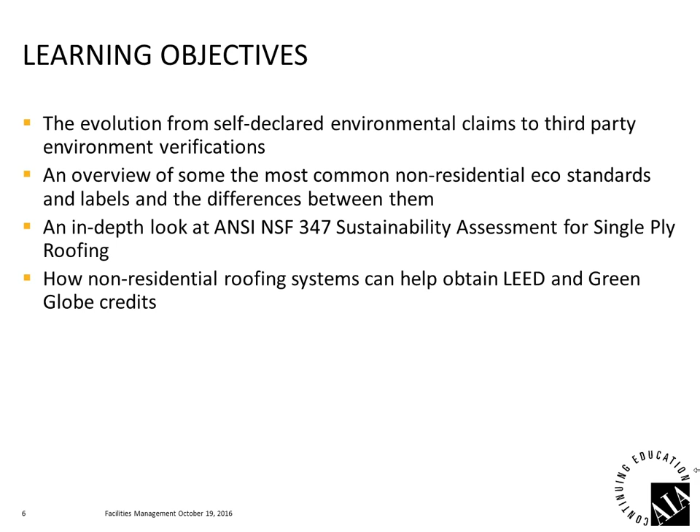So the objectives of the program today: we're going to talk about some examples of self-declared environmental claims and how they've evolved to third-party verified claims and environmental attributes. We're going to look at an overview of some of the most common standards and labels that are out there, and we'll talk about the differences between them. We will go into some depth talking about the ANSI, the American National Standard, NSF 347 Sustainability Standard for single-ply roofing. And we will wrap up with a discussion on some of the credits that are available through roofing materials and roofing systems for achieving credits within LEED and Green Globes.

So green construction materials are a big business. You've probably all seen these kind of headlines. Market for green building materials set to soar through 2019, or even more dramatic: worldwide market for green construction materials will grow from $116 billion in 2013 to $254 billion in 2020. What does it all mean, and how do we sort this out? We obviously all want to do the right thing, but how do we choose the right materials and address these questions?

So there are various ways to assess the ecological profile of construction materials and construction systems. At a product level, we can look at single attributes, and we'll show some examples later, life cycle environmental impacts, and we'll talk about that as well, and multivariable comprehensive assessments, which get more and more sophisticated as we go down that line of attributes and standards.

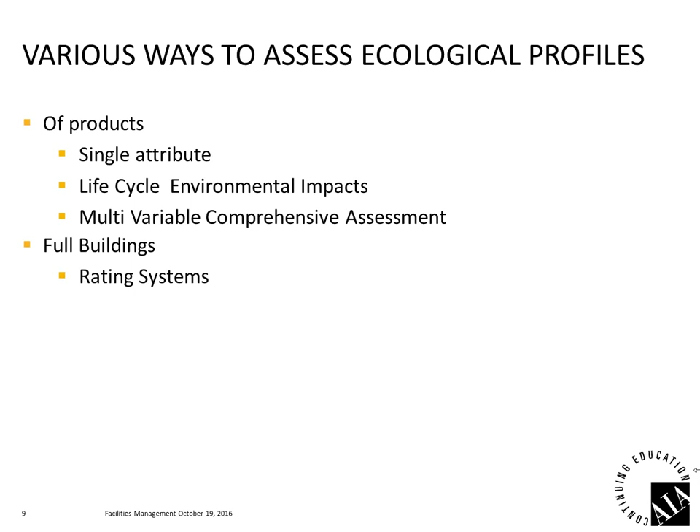The other way, of course, is to look at full buildings, and there we're looking at rating systems like LEED and Green Globe, and we will touch on those as well. So let's move into what is probably the most common of the single attributes that are known to all of us, recycling and recycled content.

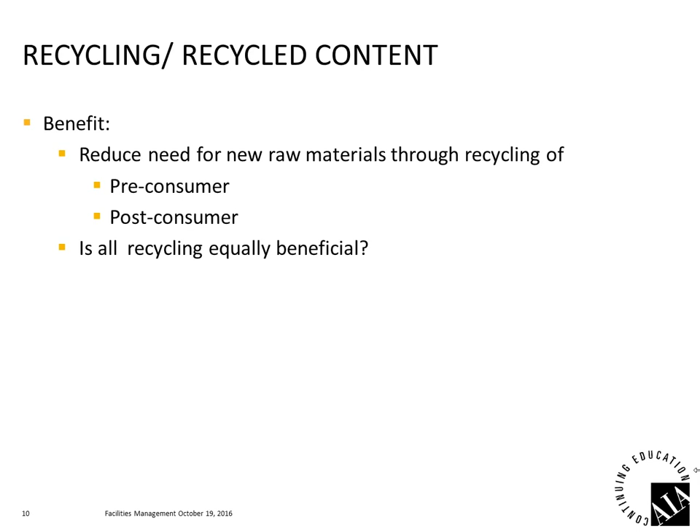Clearly, as a benefit to recycling material, we reduce the need for new raw materials through recycling back into our products, both at a pre-consumer level, in the manufacturing facility before they go out to the construction site, and at the post-consumer level at the end of the service life when the materials can be reclaimed and possibly recycled. Are they equally beneficial from both levels?

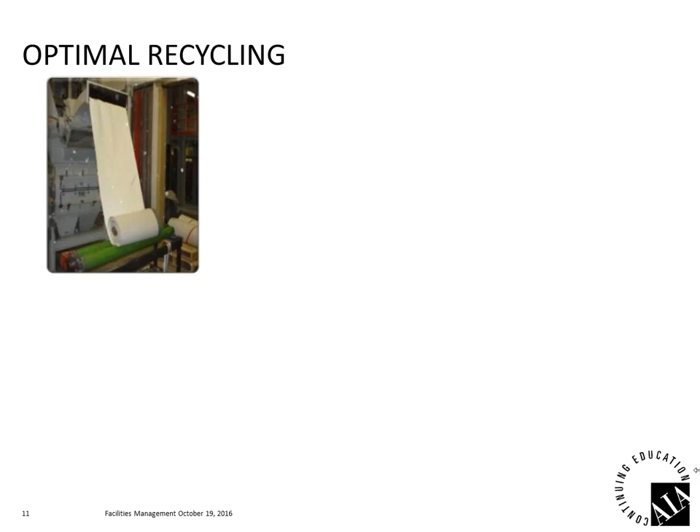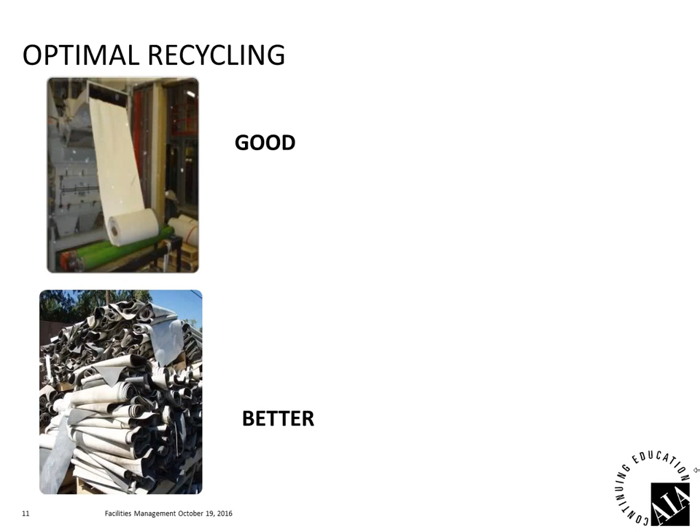Possibly. Optimally, obviously, we want to recycle the materials from our plants and our production facilities, and that, of course, is good. Even better is if we can take back the materials at the end of their service life and recycle those as well. So if we can combine these materials and process them into something of a finished good is ideal. And then in a perfect world, what we try to do is recycle them back into the same type of material that they originated from and provide the same sort of life expectancy.

In this case, trimmings from a production facility as well as material at the end of its service life on a roof are combined and processed into new roofing membranes, which will then go out and provide decades more of service. Ultimately, the ideal closed loop recycling, if you will.

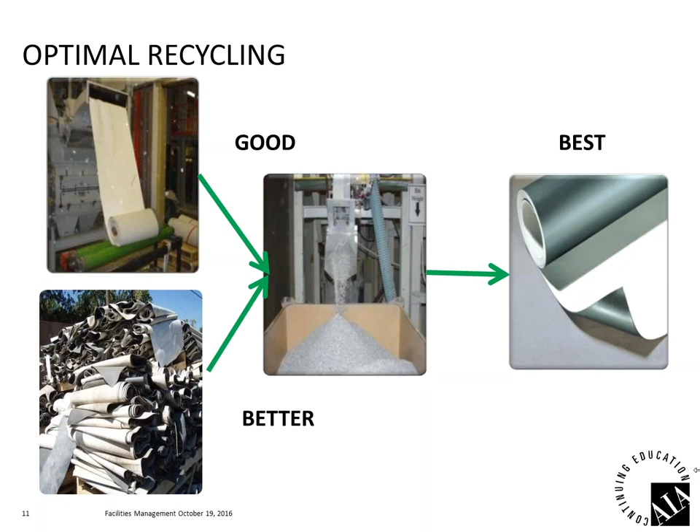Like with many environmental claims, there are a lot of claims made about recycling, particularly as it relates to end of service life recycling. Many vendors will claim that theoretically they can recycle their material at the end of the service life. Technically, they can, but in practice, it may be another story altogether, and there's often evidence that it's not necessarily done despite some of the claims.

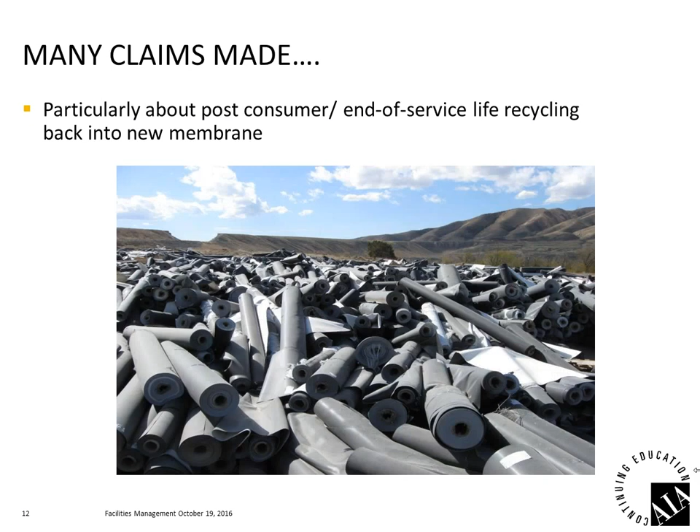So what we'd encourage people to do is request that vendors who make such claims provide them with third-party certification of these claims, and that can be claims for recycled content, for example. It could be claims for bio-based materials and many, many others. And entities like UL Environment will certify those claims. They will validate those claims by auditing facilities,

following the supply chain of materials from being removed from a roof to being processed to being integrated into a membrane, for example. So if that is something that is of importance to you, we would encourage you to ask for a third-party verification of the claim.

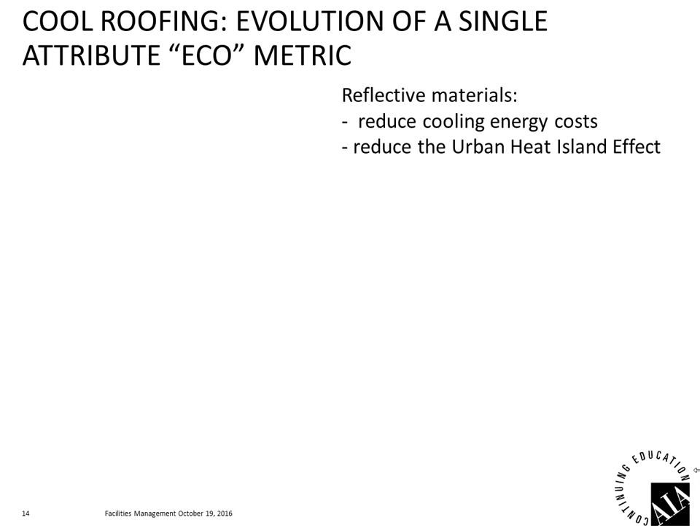Another example of a single attribute that is often referenced in the sustainability world, particularly in the roofing world, is the cool roofing area. For a couple of decades now, cool roofing membranes have been acknowledged as providing energy savings benefits and having an impact on reducing the urban heat island effect.

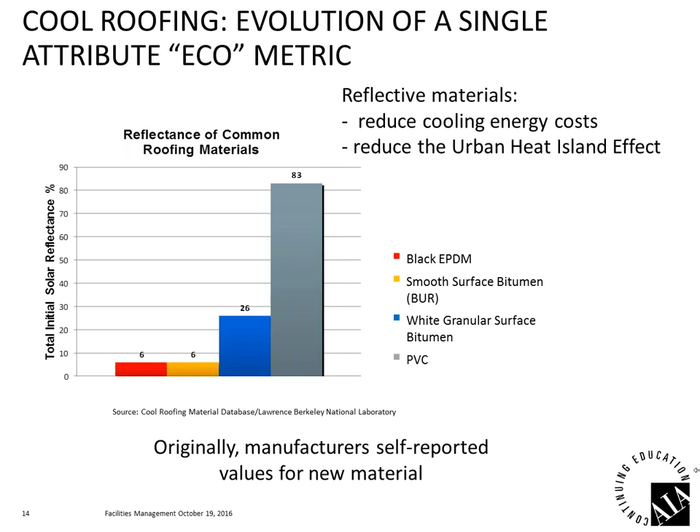In the early days, manufacturers simply tested their own materials and reported their own values in their data sheets and so on, possibly based on different test methods, one from another. So it was difficult for the users to have a proper appreciation of the actual value and the benefit. Over time, Energy Star got involved. Energy Star created a program for roofing materials, and they took things a step further.

They called for reporting of the more relevant aged values because, of course, roofing materials will soil over time, and the reflectivity values that are reported for new materials will not necessarily be those values that are experienced in the field. So that was definitely a giant step forward, as well as creating a database for this data.

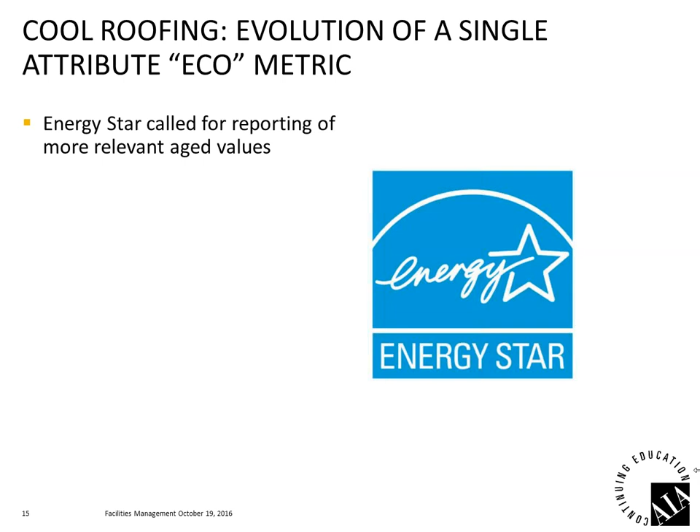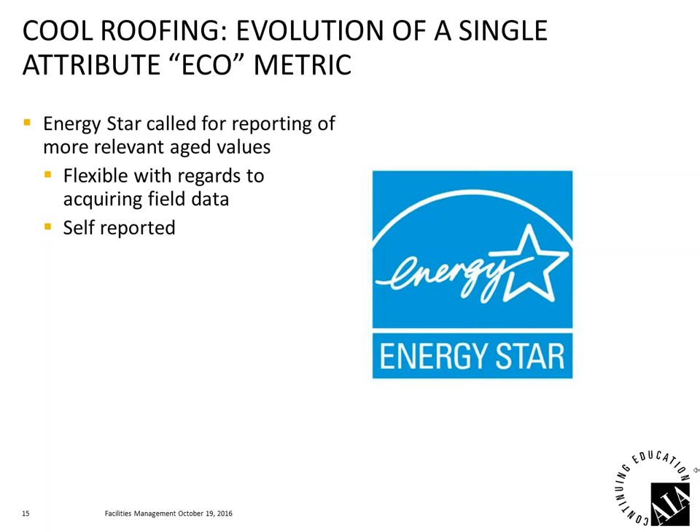They allowed considerable flexibility in acquiring the field data for the aged material, and they allowed for self-reporting. So there was some progress there: a better metric using aged values as opposed to new values, providing some definition on how to achieve those values and providing a database, all the while still allowing manufacturers to self-report their data.

Then over time, the Cool Roof Rating Council came into being, specifically as a result of California's Title 24, where they mandated prescriptive applications using cool roofs in the state of California for energy savings purposes. The Cool Roof Rating Council was founded as the independent body that would manage the data that would be the basis of the Title 24 claims in California and the ratings and so on, and is now commonly referenced and used throughout the country for different purposes, including for Energy Star.

They developed sampling, testing, and standardized aging protocols, which put everybody on the same path, using the same methodologies and the same testing methods, which makes the data more comparable. Most importantly, they required that all testing be done by approved third-party laboratories and that the aging be done at approved third-party weathering farms, defined weathering farms in 3 distinct locations. They developed a database, which is an excellent source of cool roof data on the reflectivity of materials, the aged and new reflectivity of materials, emissivities, and so on.

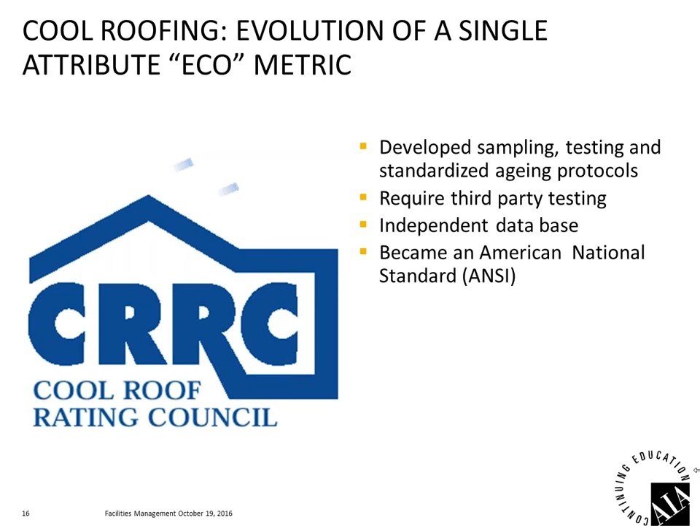And most importantly, they went through the process to become an American national standard, which provides a lot of credibility, provides the ability to reference this data in all types of government programs, for example, and is the epitome of the type of standards that we'd want to reference, and we'll come back to that throughout the course of the presentation. So that gives us a very good example of something that started off on a very low level, self-reporting, very few guidelines, to now a very formal program where people that use the data can trust the data and have very good sources of data available that are comparable amongst different materials and so on. But nonetheless, that is still a single attribute metric.

Now, there are certainly some pros and there are certainly cons to single attributes. The pros, of course, are that they're simple, they're easy to understand. You either have recycled content in your material or you do not. You achieve a certain reflectivity value or another value. One product may have a higher value than another. Very clear, very easy to do. If that's what's important to you, then that allows you to focus on that. If recycled content or organic-based raw materials are important to you, or reflectivity is important to you, you can focus in on that, get good data, and very often that data is third-party verified or certified.

There are, of course, some significant shortcomings. Obviously, that's a very narrow focus on a single attribute or maybe a couple of attributes. Generally, what can happen and will happen is by focusing on a single attribute or maybe a couple of attributes, we might ignore a number of other equally and often more important environmental attributes. So certainly a benefit to them, but certainly some very real limitations. And again, if you are going to use those, we encourage you to look for values that are available through third-party testing, third-party documents, rather than simple claims.

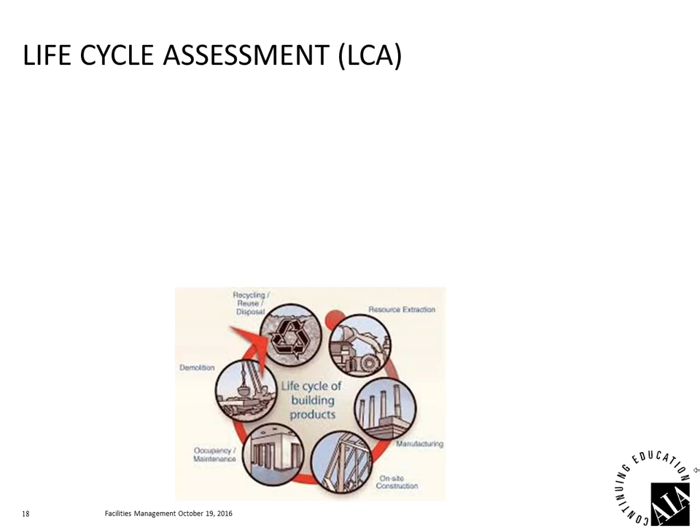The next level of sustainability standard or reporting is life cycle assessment. Life cycle assessment involves a technique to look at a product's life cycle impacts through the entire stage, from raw material extraction at the very least and always, to the end of the service life in some instances, and we'll cover that in a little greater detail in a moment. The idea is to compile an inventory of material and energy inputs. So the material could be raw materials and so on, and then of course energy, as well as outputs, which could be releases, consumption of water or other materials, or releasing things into the environment. And that's done across a number of environmental impacts, and then they go into a calculation methodology that gives us a quantitative measure of a product or a system's environmental impact through various stages.

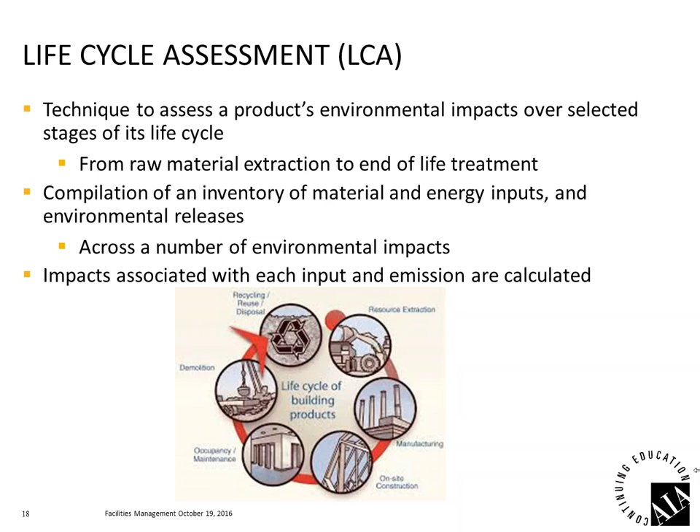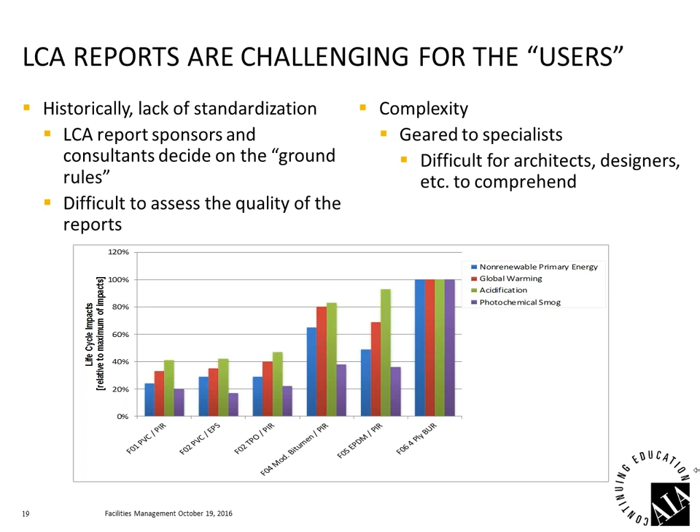Life cycle assessment reports are very complicated documents. The process is very complicated. You can see here some of the metrics are a little alien to us: non-renewable primary energy, global warming potential, acidification, photochemical smog. Historically, these reports were done by consultants with their clients, both of whom would decide on the ground rules. And like most things in life, the devil is in the detail. Often the details were very hard to find in these reports, and it's very difficult to assess the quality of the report, the validity of the conclusions or the data that was presented. And the reality is these are very complex documents, written by scientists for other scientists, and very difficult for architects or building operators or designers and others to comprehend and to use the data.

So the International Standard Organization, recognizing that challenge, developed protocols on how to conduct life cycle assessments and how to report their results. These are called environmental product declarations, probably a word you've heard. They're becoming very, very popular for a variety of reasons. And we'll talk a little bit about them, where they come from and how they are generated.

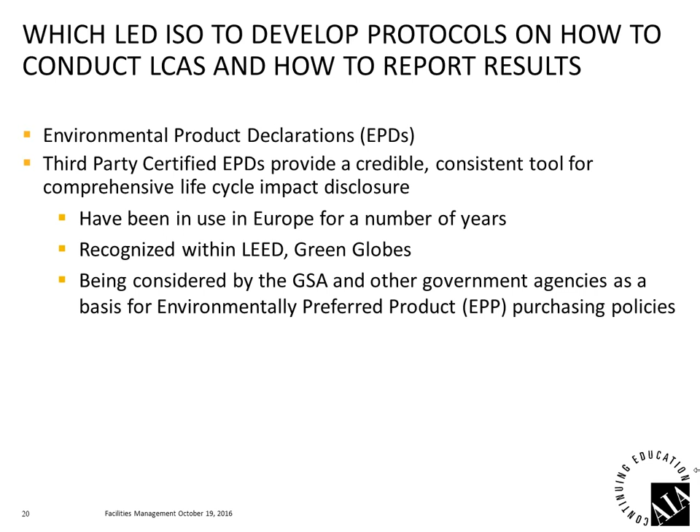Typically, a third-party certified EPD gives you a very credible, consistent tool for assessing life cycle impact data. They've been in use in Europe for a number of years now, going back probably to the late 80s, early 90s at the very least. They are now recognized in both LEED and in Green Globes, and they are being considered by the General Services Administration and other federal agencies like the Department of Defense as a basis for environmentally preferred product purchasing policies and decisions.

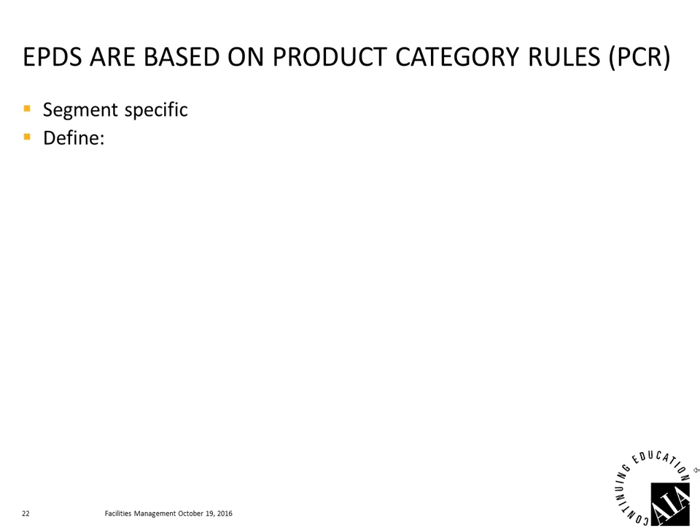Environmental product declarations document products' life cycle environmental impacts and are LCA based. In a sense, they standardize the LCA, the life cycle assessments, and instruct on how to report that data. The key is that they allow for transparency with regards to a product's environmental impacts. So they're segment specific, so that means within a given type of construction material, insulation, roofing membranes, wall panels, glass, or whatever the case may be. Typically, they will have the following elements in each of them.

They will have a declared unit. So in the case of a roofing material, that declared unit would be one square meter of membrane. So all the data that you will see reported will be for 1 square meter of membrane. The one thing you'll note with environmental product declarations is they are typically done in metric units. 1 square meter of membrane is about 10 square feet of membrane.

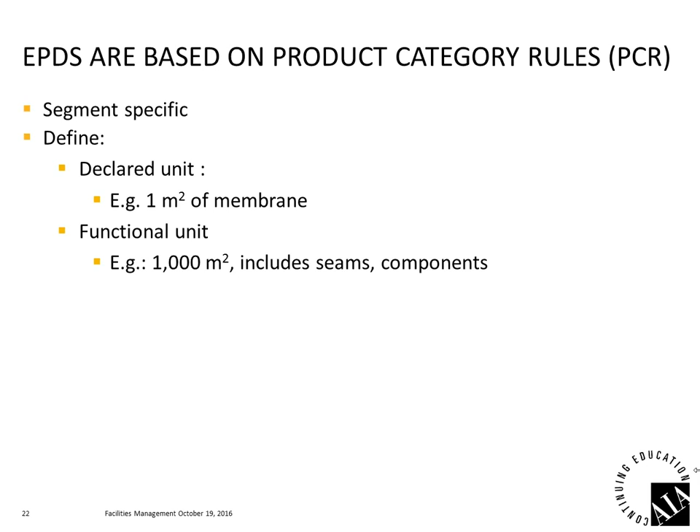Now, that is a declared unit, and it does not reflect physically what happens in the field, which is a functional unit. So a functional unit may be defined, in this case, sticking with the example of a roofing membrane, as 1,000 square meters or 10,000 square feet, for example, which would include seams and overlaps, any materials you might need to create those seams. If you're using a rubber-based sheet, you would need adhesives and tapes and primers and so on, and they would be included. And depending on the system you're defining, whether it be adhered or mechanically attached, it would also include the components, be it fasteners or adhesives, for example.

Beyond that, it will define a number of the technical aspects of the environmental product declaration being considered. One is the impact categories. There are about 24 impact categories, and many are not practical in all cases. Some are very, very specific and may apply to very specific types of products. And secondly, these environmental product declarations are very expensive to develop, and one tends to, through the product category rules, narrow the impact categories down to the ones that are most important and have the most impact for a given type of material, typically anywhere from 3 to half a dozen.

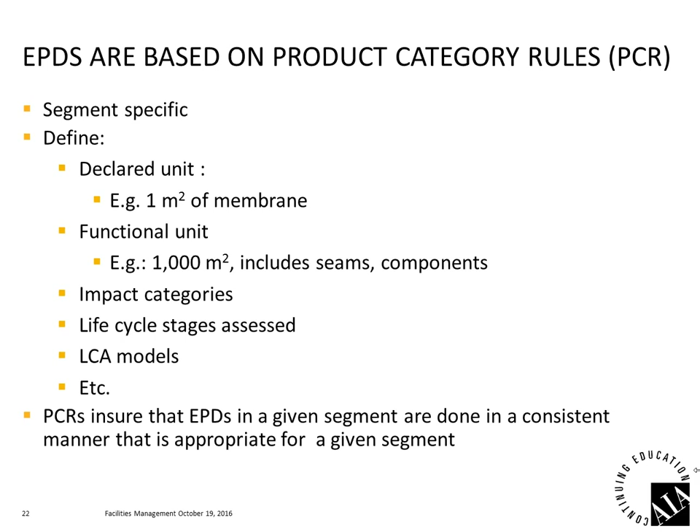It will describe the various life cycle stages being considered. It will describe the life cycle assessment models. For example, in the US, we typically use the EPA's TRACI model for life cycle assessments. Europe would use different models, and so on. And the idea is to ensure that for a given segment, thermal insulation, for example, all the environmental product declarations are done in a consistent manner and reflect the appropriate elements, such as the appropriate impact categories for the given segment.

In the low slope roofing industry, we're actually well served. All the most important components that we use in low slope roofing already have product category rules. So the bituminous roofing materials, modified bituminous, built up bituminous, asphalt shingles, for example, have product category rules. Single ply roofing membranes also have product category rules, as well as the thermal insulation. So we can cover all the key components of a low slope roofing system with environmental product declarations.

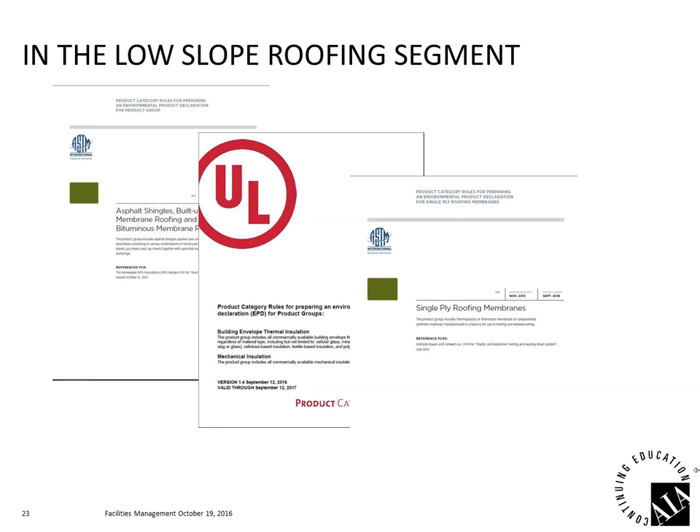So literally we're looking at all the impacts related to extracting the raw materials from the ground or from the earth, processing them to the degree they have to be processed, any transportation between where they were extracted, where they were processed, and where they might be transported further to the manufacturing facility. All the impacts related to the actual manufacturing of the product, and this would be considered a gate. So all the elements I just described would be one gate, for example, a product stage. Then you would move on to the construction process.

Then you would also look at the transportation, and you'll see that come up many, many times. Transportation, of course, has a significant environmental impact, and the further you have to ship materials, the greater the impacts, and those are considered. Then we would have any energy or other materials that are involved in the actual installation process, and they would also have impacts, and they would be classified and quantified here. So we would have our second phase, the construction process stage, which would be phases A4 and A5.

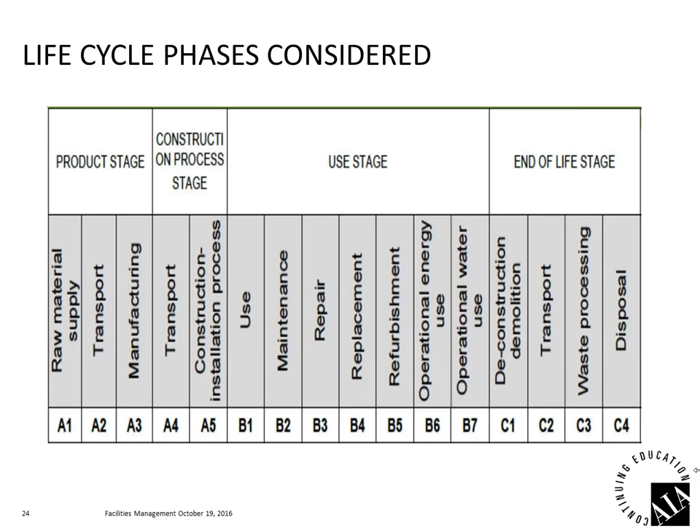And then the end of life stage, as the name implies, is what happens at the end of the service life when you deconstruct the assembly and demolish it or the building. You'll again have to transport the materials that you've generated. You will have to process them in some way and dispose of them. And that, of course, could be transporting them for recycling and then reintegrating them back to the start of the process as a new raw material.

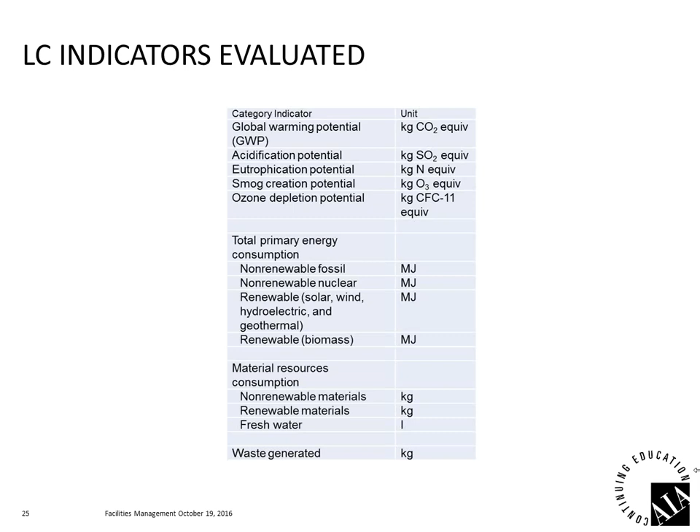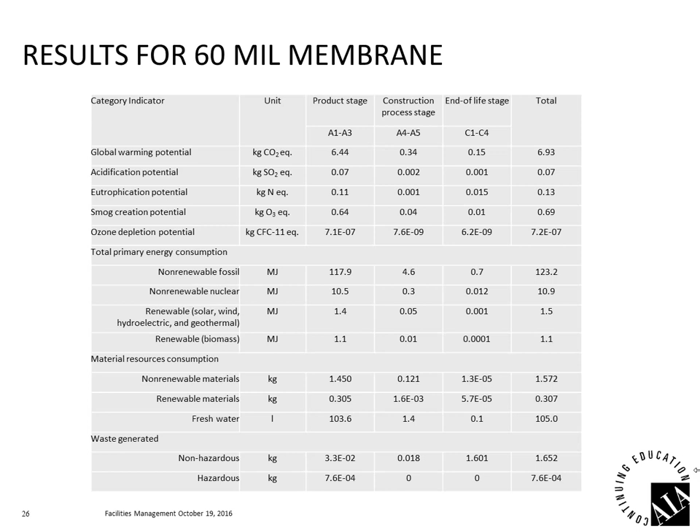And the same as we go down the table there for non-renewable fuels and renewable fuels and material consumption and so on. So that is the most essential part of an environmental product declaration, and that is the type of data that you will get from such a document.

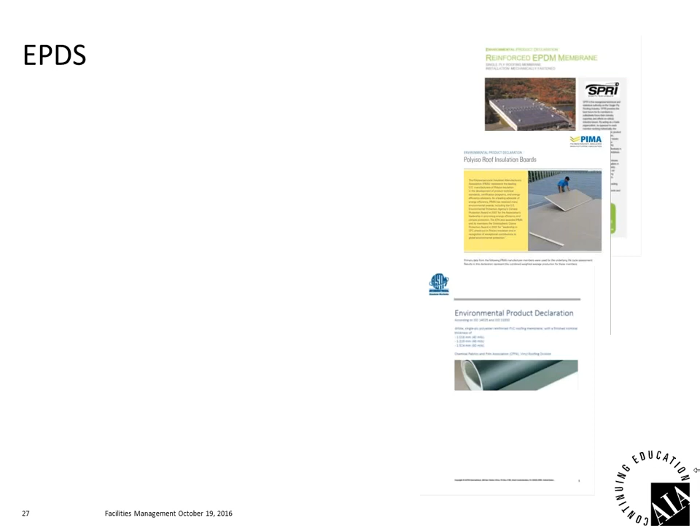So the environmental product declarations are available in a couple of ways. They can be done on a generic type of level. So you can get an environmental product declaration for PVC roofing membranes, for example, which is what's shown at the bottom of the little stack of 3 environmental product declarations, or TPO or EPDM, which is at the top, or for polyiso insulation, which is in the middle there.

These are typically done by trade associations, and the specific document covers only those products that are listed within the environmental product declaration. So if a manufacturer sells or markets a similar product, for example, a PVC, and tries to tell you, here's my environmental product declaration, if they're not actually listed in there as one of the companies that participate in that environmental product declaration, it is not considered to cover their product, and they are not compliant with it and cannot use it.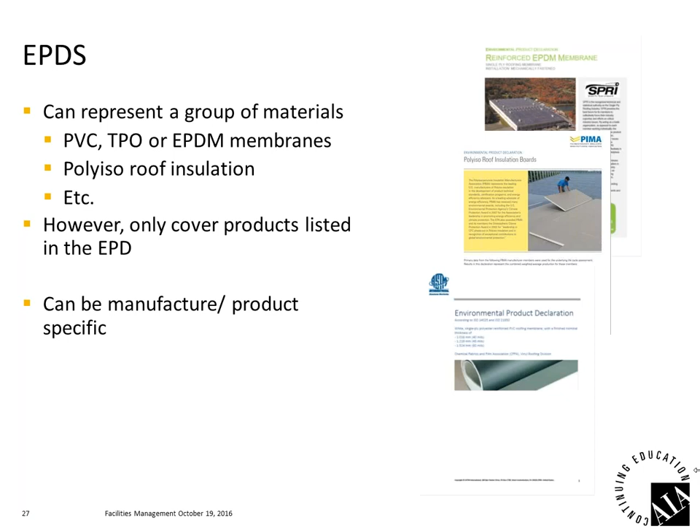And then, of course, environmental product declarations can be completed and are available for a specific product from a specific manufacturer, which of course is even better, more accurate, more specific to the product that you might be using. Now, environmental product declarations are a step further from single attributes. They cover many, many attributes of the product over different periods of the life cycle, but there are still some challenges and some shortcomings with regards to environmental product declarations.

Environmental product declarations, if we are to do a cradle to grave, which is from extracting raw materials to the end of the service life and either disposal or incineration or recycling, can only be done if we have a reference service life. And reference service life is essentially the life expectancy of the product. Life expectancy is the biggest single driver of any life cycle assessment. And the challenge is that we don't have a standard definition for something like a roofing membrane to say that the reference service life of product X is Y years, 10 years, 20 years, 30 years. And that, of course, is very, very important if you want to do a proper cradle to grave environmental product declaration.

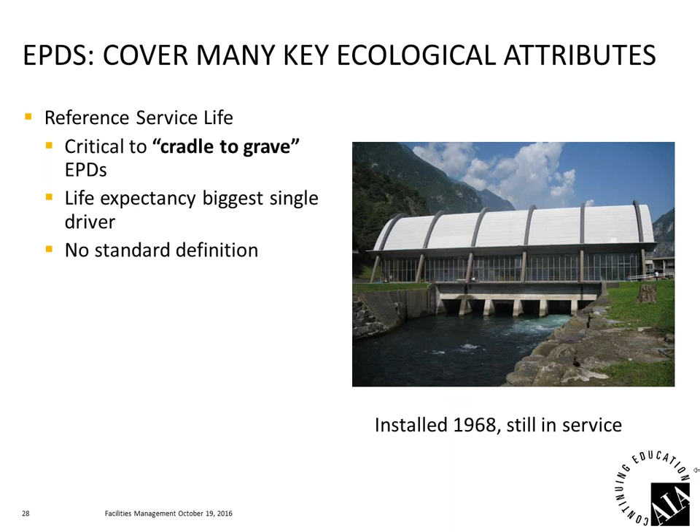And at this point, it's probably a good point to remind people, one of the things that we can't lose sight of as we strive to be ever more sustainable is performance. And at the end of the day, the most important sustainability attribute of a product is its durability. And the longer something lasts, particularly when we're talking about building materials, and more specifically about building envelope materials, where it is very expensive and very difficult to replace them, durability and life expectancy are very, very important.

So in the short term, because we really do not have a standard definition for reference service life, the environmental product declarations will likely be cradle to gate. That would be specifically the manufacturing of the product and possibly up to the installation of the product with the associated accessories of fasteners or seam tapes or adhesives or something like that. At this time, certainly in the roofing industry, there are no cradle to grave environmental product declarations that are ISO compliant.

A number of them were done many, many years ago before these product category rules were developed, and one would really not be able to use those today because they're not built on the standards defined by the product category rules. The challenge with that is that, according to the International Standards Organization, cradle to gate environmental product declarations are not intended and not suitable for comparison.

And the reason for that is if product A has, for discussion's sake, 10% lesser environmental impacts than product B, but if product B lasts twice as long, that's not captured in a cradle to gate and can give very misleading results. So the International Standards Organization cautions that cradle to gate environmental product declarations should not be compared one to another, or you should not make product decisions based on that because it can be misleading without the cradle to grave element or the reference service life element.

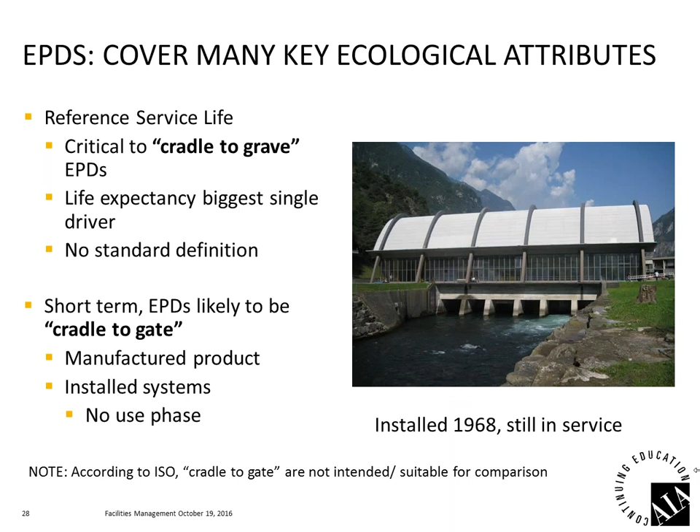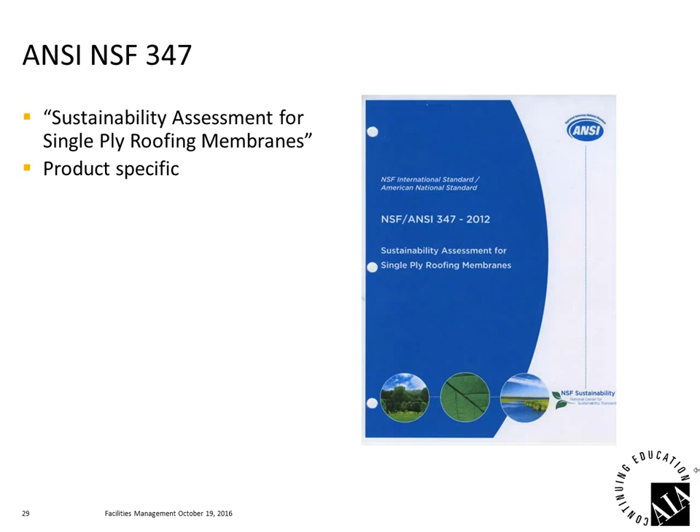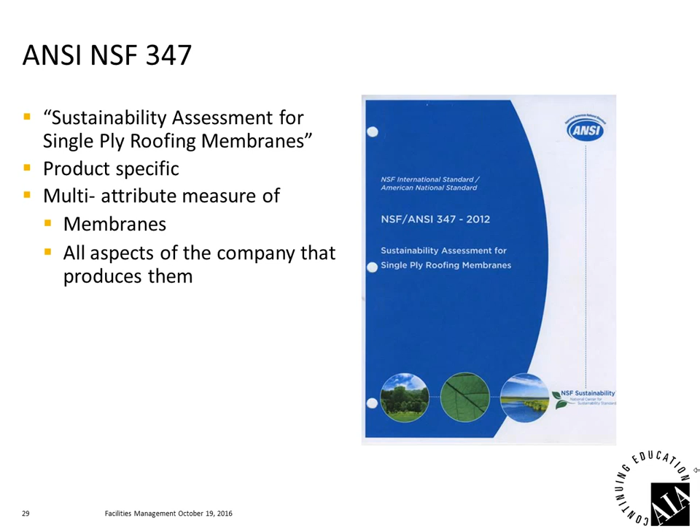So now moving on to the next step in our evolution of eco-labeling and eco-standards, we're going to talk about ANSI, which stands for American National Standards Institute, NSF 347. NSF 347 is the Sustainability Assessment for Single-Ply Roofing Membranes. The assessments are product-specific. Unlike environmental product declarations, you cannot do a sustainability assessment for a group of products because it's very specific to a material, very specific to the aspects surrounding that material, the company that manufactures it, how it manufactures it, and a variety of other things that we'll go into detail here in a moment.

So it is an American national standard. Again, that means it can be referenced in government purchasing policies, can be referenced in building codes. In fact, it is now, and I'll bring that up in a moment. Green Globes formally recognizes the ANSI standards. There's a suite of them, which I'll describe at the end here, but specifically as it relates to roofing materials. And in fact, now the International Green Construction Code in the 2015 edition does reference these ANSI NSF standards. These multi-attribute standards are referenced to define sustainable materials, including NSF ANSI 347, which is the standard for single-ply roofing membranes.

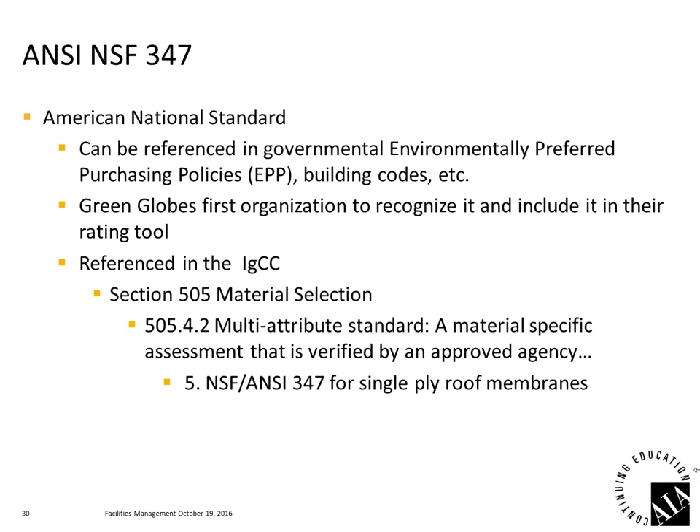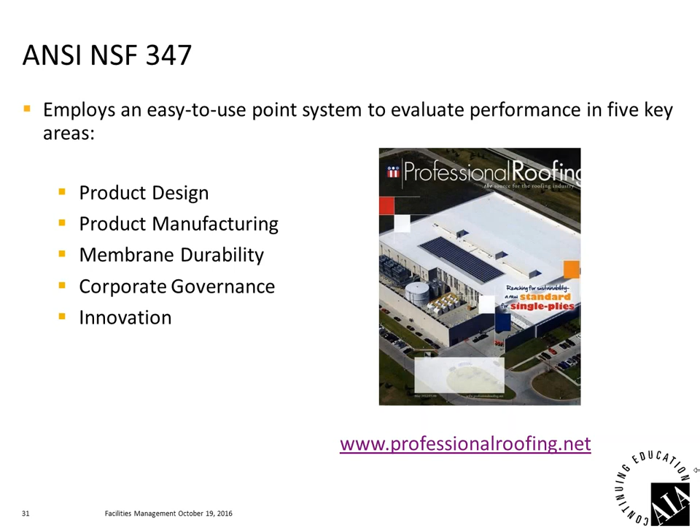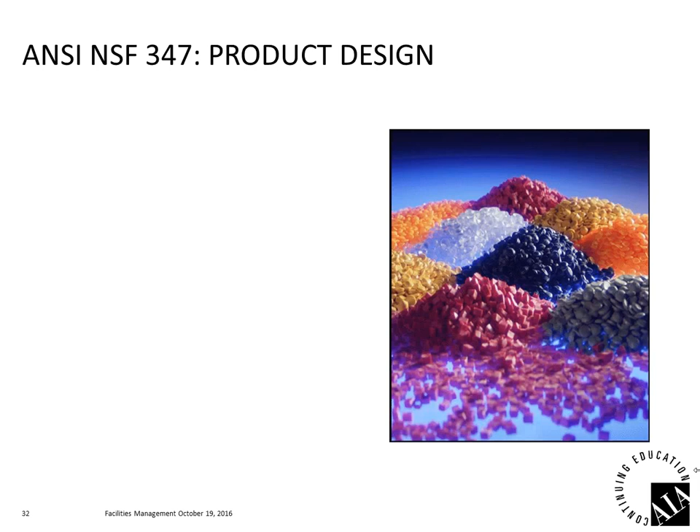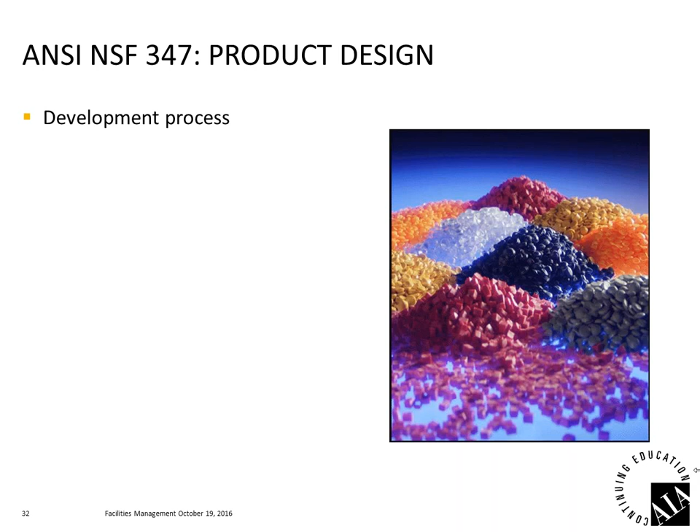So the first area assessed within ANSI NSF 347 is product design, and that goes from the development process. As part of the audit process, you have to demonstrate that the development process within the company has formal checklists and formal processes to ensure that sustainability and environmental impacts are always considered in the development process for new products. You have to demonstrate the use of sustainable inputs like recycled materials and bio-based products and so on. The use of those materials provides additional points. Failure to have those materials does not cost points, but does not gain points.

There is a section on chemicals of concern. So there are 6 lists, such as the International Agency for Research on Cancer and a few others. And if you have raw materials that are on those lists, you do not get points. But if you do not have any of those chemicals, you can gain additional points for not having those chemicals on these reference lists in your product. There's an obligation to understand your suppliers, environmental policies, and whether they're complying with all environmental regulations, whether they have environmental plans and management processes in place.

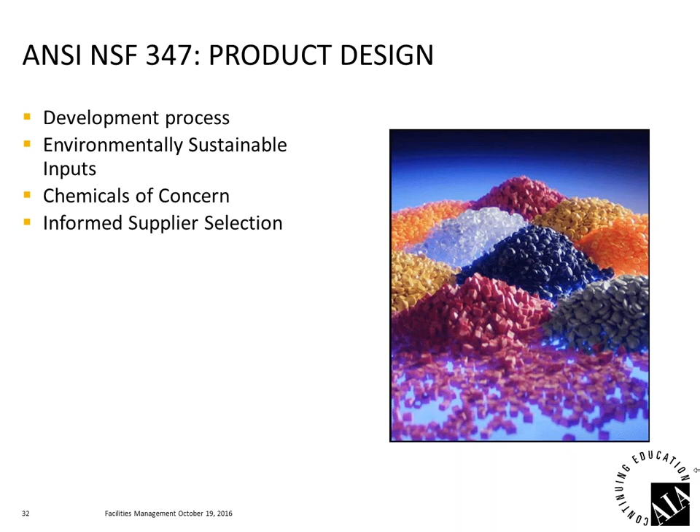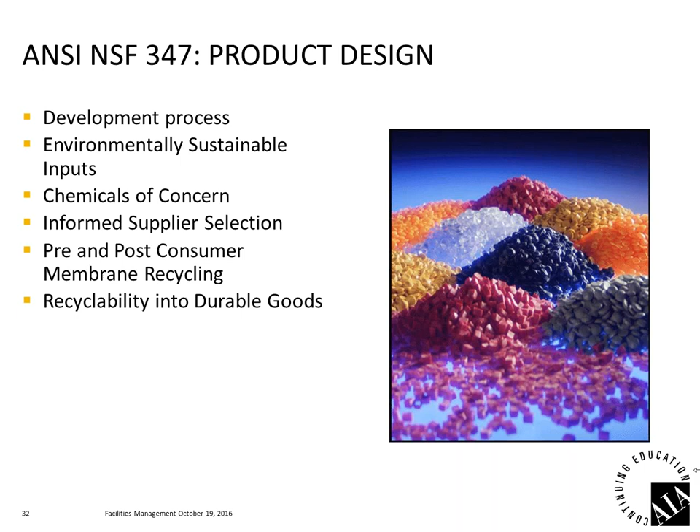They look at the use of pre- and post-consumer membrane recycling, and they also consider, if you do recycle materials, that you're recycling them into durable goods, ideally into the same material, but if not, into goods that are long-lasting. The longer lasting the goods you recycle into, the more points you can acquire in this particular section.

The next section is product manufacturing, and as the name implies, has everything to do with how the materials are produced. The manufacturer has to demonstrate that they have environmental policies in place and how they manage those to ensure that they are implemented and that they are in fact used as described. Additional points are available if third-party audits are done of the environmental management system, and additional points if those results are published. There are a series of points for emissions and usage, water, energy, raw materials, and air.

These points are set up in such a way as to provide points either for minimizing the use of these resources, demonstrating reduction over a certain period of time, particularly over 5 years, and the greater the reduction, the more points that are allocated. The standard is in some ways challenging because there are diminishing returns in doing that, and it becomes more and more difficult to keep up those levels of reduction in any of those resources. But that is one of the fundamental goals of the standard, is to encourage companies to continually improve their processes to reduce the environmental impacts.

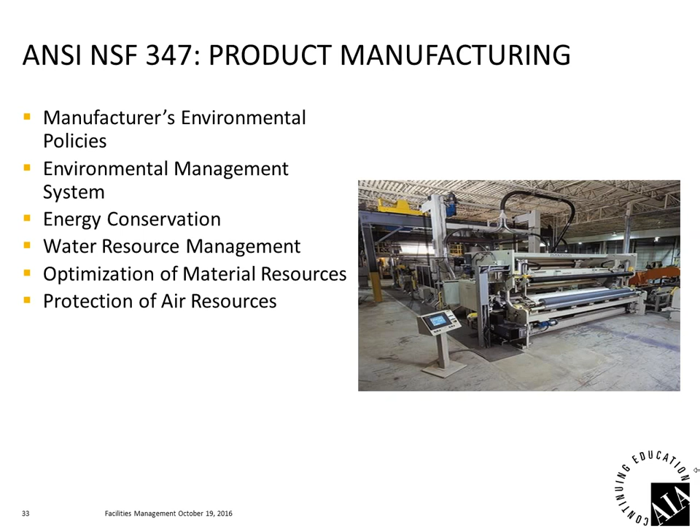The next area that is very important to the standard is durability. Going back to the point I discussed earlier, proven performance in the field is extremely important and a huge driver of environmental impacts. The standard allows for points for proven performance in the field, and the longer the material has been in use in the field and it can be proven that it has been performing in the field, the more points are allocated to that section. There's consideration of the membrane's energy surface contribution, specifically as it relates to reflectivity and energy savings, roofing energy savings.

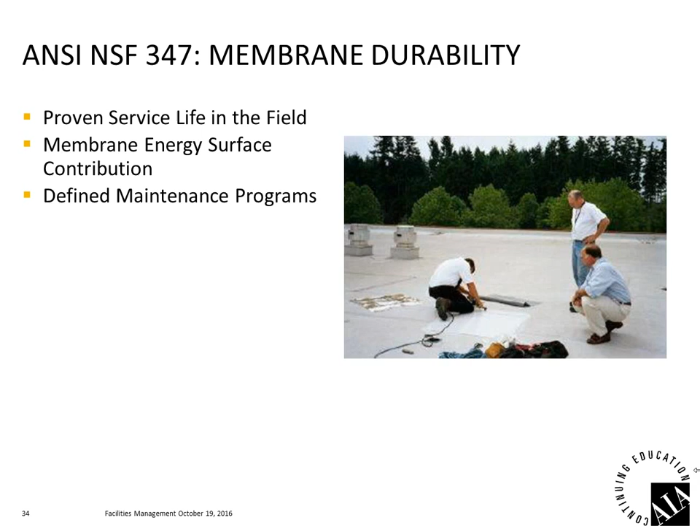The standard assesses the company's maintenance programs for the roofs. Clearly, the roofing system is more likely to reach its expected service life if it is maintained and if there are clear guidelines on how to maintain the roof to achieve that projected service life. There are points for having a field quality management system. Even the best of materials will not perform to its expected service life if it's not installed correctly, and manufacturers have to demonstrate that they do go out in the field and they do work with the contractors to ensure that the materials are properly installed.

And then there are points for ongoing monitoring of the performance of the material in the field in different climate zones to make sure that the material is performing, continues to perform, and that any findings in terms of aging mechanisms and so on are considered in the development process, again with the idea of always looking to continuously improve the product and reduce impacts.

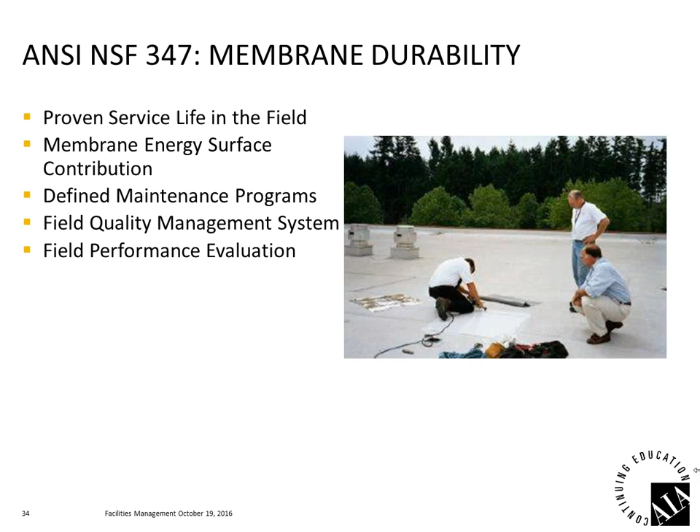Corporate governance is important to the standard with regards to labor policies. Most of the policies covered in here are really regulated in the US, and most companies will of course comply with these, but there are prerequisites to meet and there are points to be had for that. Employee relations and employee development. You have to demonstrate that you are training employees and continuously striving to improve your employees' work skills, work set, and expertise and knowledge. Safety, of course, is very important, both with regards to the employees and with regard to the stakeholders who may be in the area of the production facility.

Public outreach and education, demonstrating involvement in industry groups, whether they be trade associations, standard writing bodies, providing educational seminars like the one I'm doing right now, for example, and documenting those and reaching certain levels. And then investment in the community, which of course is a duty we should all have through our corporations to invest in our local communities. And those things are assessed as well under the auspices of the corporate governance section.

And then there is the possibility with a general kind of category called innovation, and that would involve either dramatically exceeding the levels of the various metrics that are described in the standard and achieving much higher levels, or achieving them with new and innovative techniques that result in even less burdens on the environment, or extend the life expectancy of a material or something like that. And there's the opportunity there to achieve additional points for innovation at the auditor's discretion.

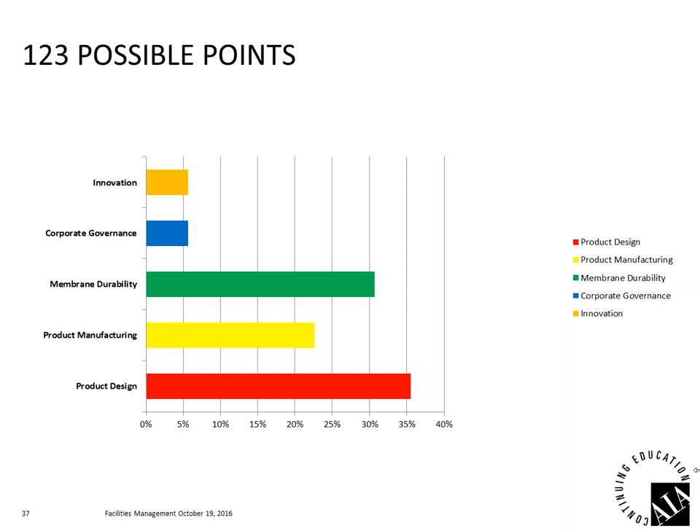Excuse me, Stan? Yep. Hi, it's Ann. I'm sorry to break in. I just did want to ask a question while you were kind of talking about the elements of the standard here and how product is so important.

And as you know, I want to make sure to get this question in as we have about 15 minutes or so left. I wanted to ask you if you could quickly mention how the ANSI NSF 347 compares, just the high points, with environmental product declarations. Are they to be compared side by side, or does the ANSI standard offer something beyond? If you can quickly comment on that.

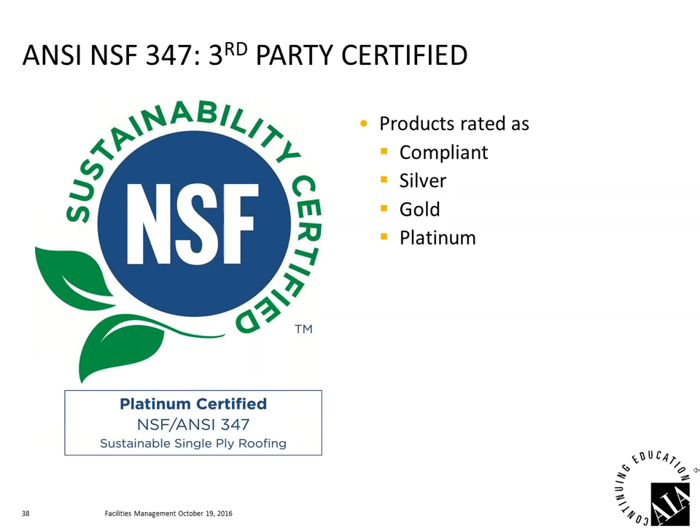Yeah, thank you. The ANSI standard goes way beyond the environmental product declarations. In fact, you can get points within the ANSI standard for having environmental product declarations, but it goes way beyond that, as I mentioned, with a focus on proven performance, with a focus on the approach to development, and ensuring you're always improving the product and doing continuous improvement. So the EPDs are an element of the ANSI standard, but it's only a small part of it, and the ANSI standard goes in much greater depth and detail.

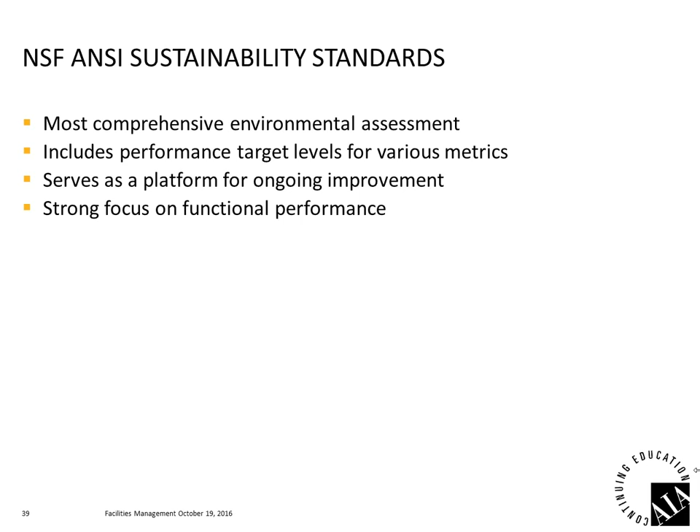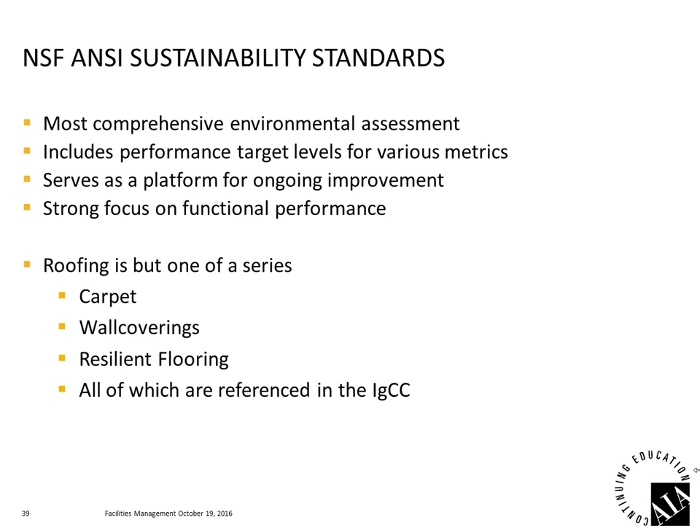So it is really the most comprehensive of all the environmental standards that we have, and as I indicated, includes performance targets, levels for various metrics, and really is a great platform for ongoing improvement and has a strong focus on functional performance. The roofing standard is only one of a number of standards. There are also a whole suite of similar standards for carpet, wall coverings, resilient floorings, and others, and they're all referenced in the International Green Construction Code.

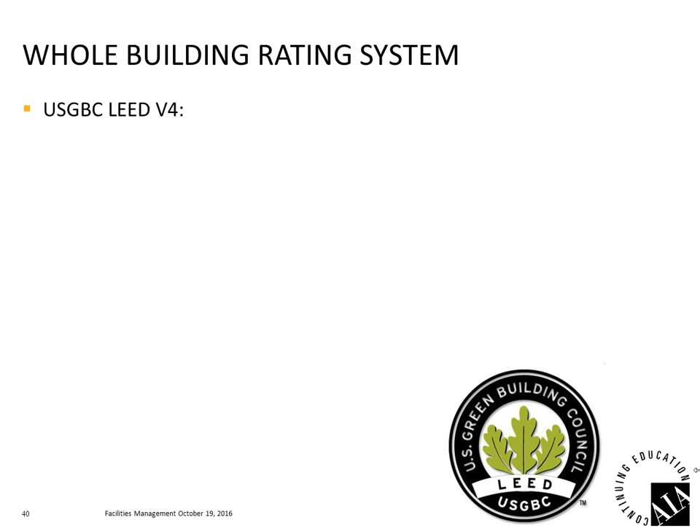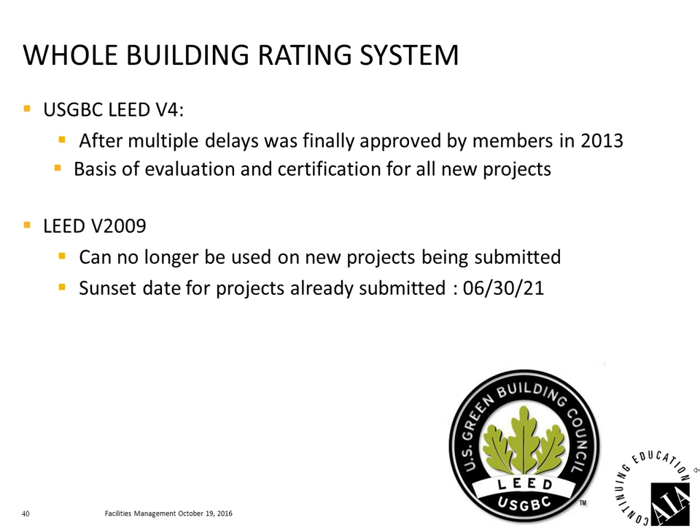I'm running a little behind time here, so I'm going to speed this up a little bit. As most people are probably aware, of the whole building rating systems, the most known is the United States Green Building Council's LEED. LEED just introduced their V4. The members agreed to V4 in 2013, but it really only came into being recently, and now all projects have to be registered with LEED V4.

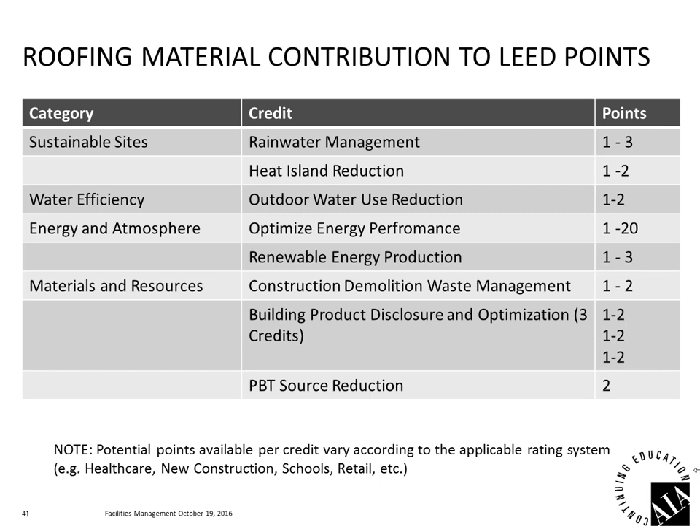There are a number of categories within LEED where roofing materials can contribute directly and indirectly. Some of these are summarized here, and I'll show some concrete examples. The number of points will vary depending on the LEED rating system you're choosing, whether you're doing it for healthcare, new construction, schools, retail, data centers, and so on. And that's why you see a range of points there for the various metrics.

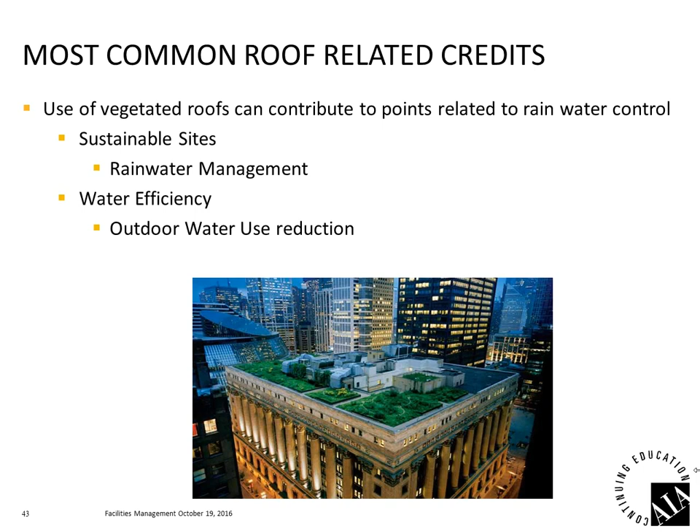Some of the most common related credits for roofing: using vegetated roofs can contribute points in a number of ways to sustainable sites. Credits with regards to rainwater management, a very important criteria as we have greater and greater problems in most of our cities with rainwater runoff from hard surfaces like roofs and paving. They can also contribute to the water efficiency credits if the green roof does not require extensive watering and sprinklers, for example. And they are now another way of achieving the urban heat island reduction credit.

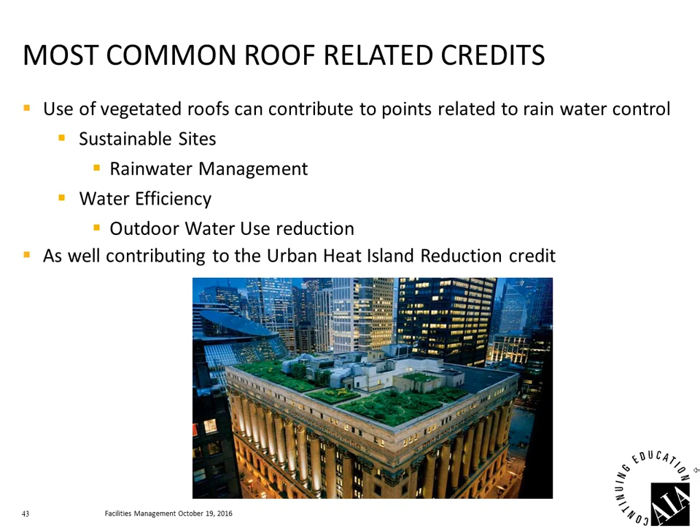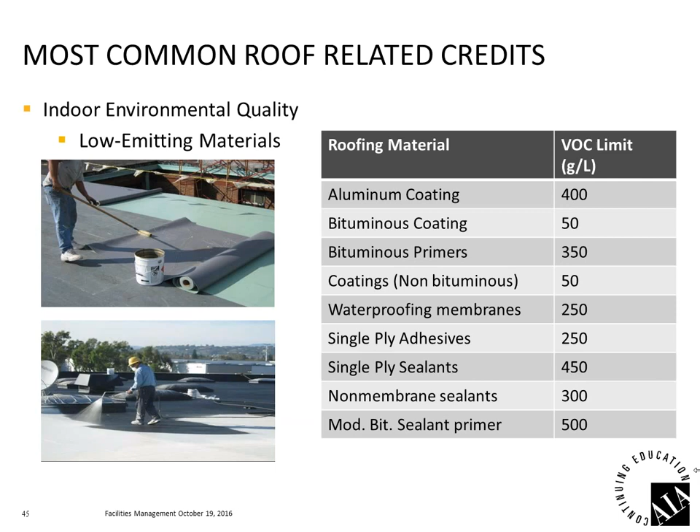The most common way of achieving the urban heat island reduction credit, of course, is to use white, highly reflective roofs, the simplest way to achieve that credit. The name is a little misleading: indoor environmental quality also includes a lot of the materials that are installed on roofs, and the idea is to have low emitting materials, so low VOC content materials, and you'll see that come into play with roofing adhesives, for example, roofing coatings, sealants, and other roofing chemicals.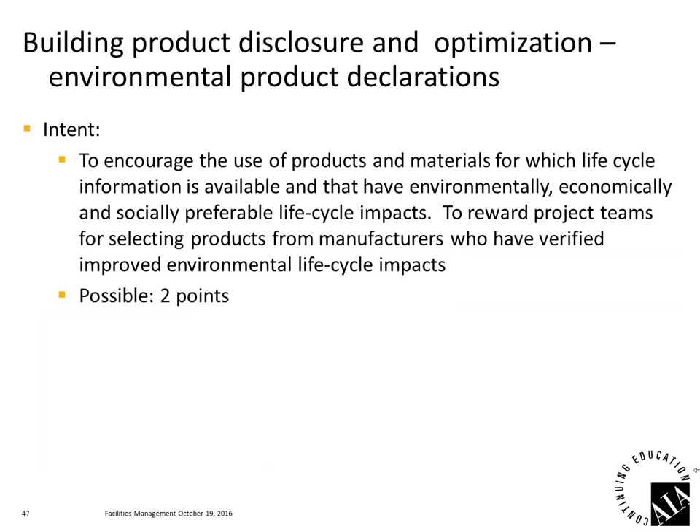There are some new credits that were introduced this year: building product disclosure and optimization. The first one allows for environmental product declarations. So this is the first formal use we've seen of these. As can be seen, you can achieve partial points by using generic industry EPDs.

Let's set off the timer. Sorry about that.

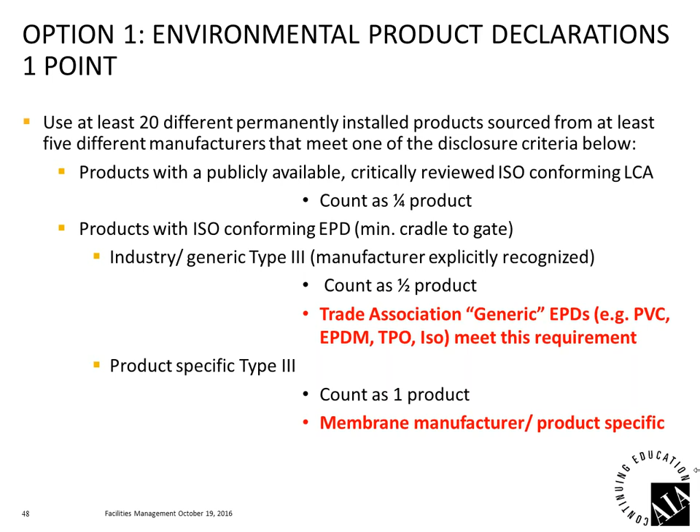Or you can get a full point, if you will, for each product you have that has its own manufacturer-specific Type 3 third-party certified environmental product declaration. Then there are a couple of other building product disclosure and optimization credits. We won't go into these here. They are very complex and very challenging. They require extensive documentation. Not many manufacturers, if any, are ready to meet those criteria yet. And in fact, industry is working with the USGBC to see if there's a better, simpler, easier way to achieve the same results.

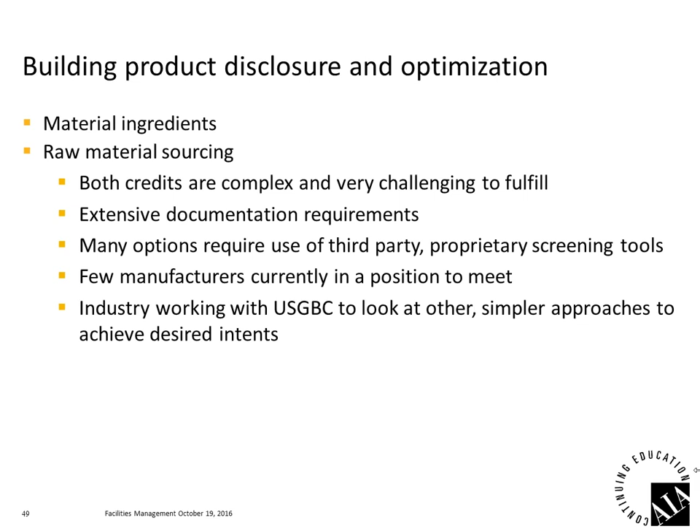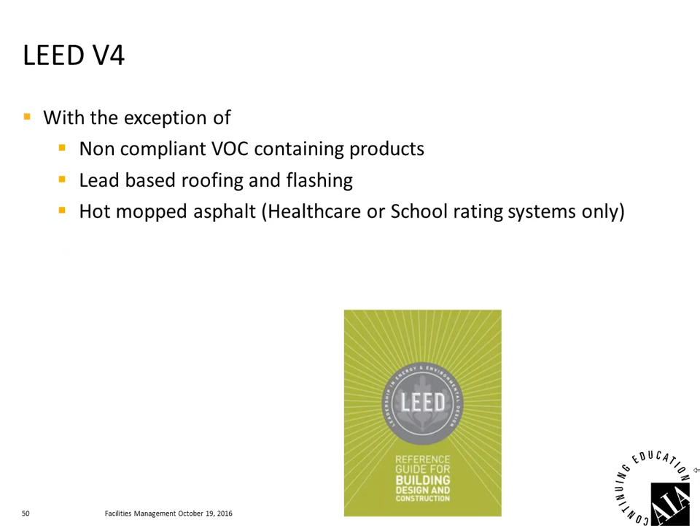So LEED V4, with regards to roofing materials, with the exception of non-compliant volatile organic compound or solvent-containing products, lead-based roofing and flashing, and hot mopped asphalt, has no limitations on the use of any types of low-slope roofing materials currently available on the market.

The second whole building rating system, not quite as well known as LEED, a lot newer, is Green Globes. Green Globes was selected by the General Services Administration in October of 2013 as the second certification system that could be used on federal projects, the first, of course, being LEED.

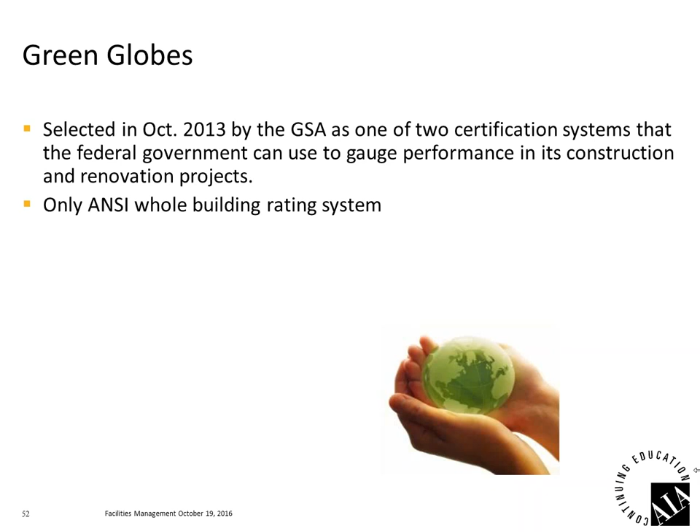The big difference, a significant difference, not the only difference, is that Green Globes is an American National Standards whole building rating system, which, contrary to perception, LEED is not. And though it is newer, it is gaining momentum quickly and is being recognized by a number of government agencies and leading private institutions throughout the country.

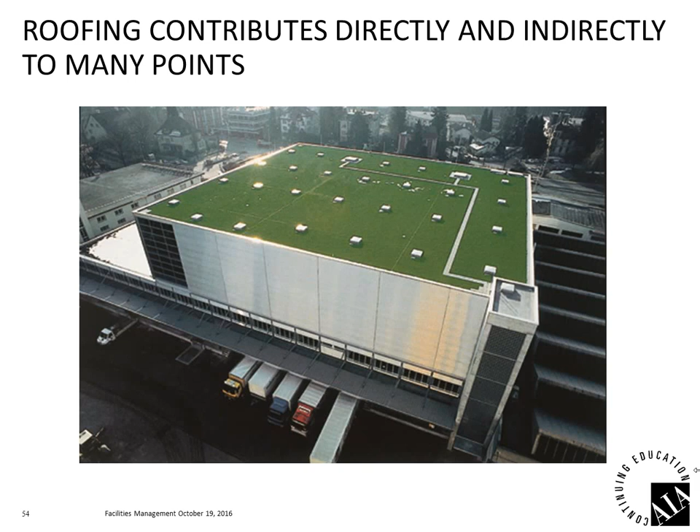And as in LEED, roofs can contribute to numerous points throughout the rating system. Similarly, heat island effect reductions and stormwater management through the use of green roofs for both of those, or with reflective roofs for the urban heat island effect reduction.

There is a strong focus on energy, some obvious things like thermal resistance and amount of insulation, but other less obvious but equally important, the importance of detailing at penetrations and roof edges to ensure there's no air leakage, using air barriers, and of course, as in LEED as well, the opportunity to have renewable sources of energy, which can be roof mounted and can contribute points in that way as well. For example, through the use of rooftop mounted solar.

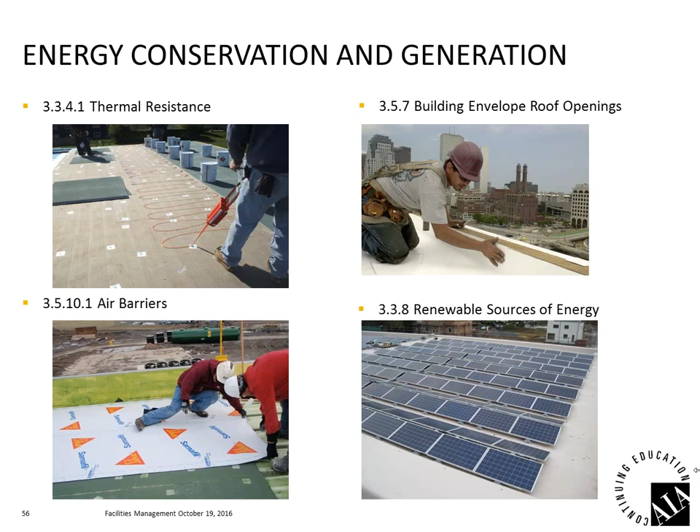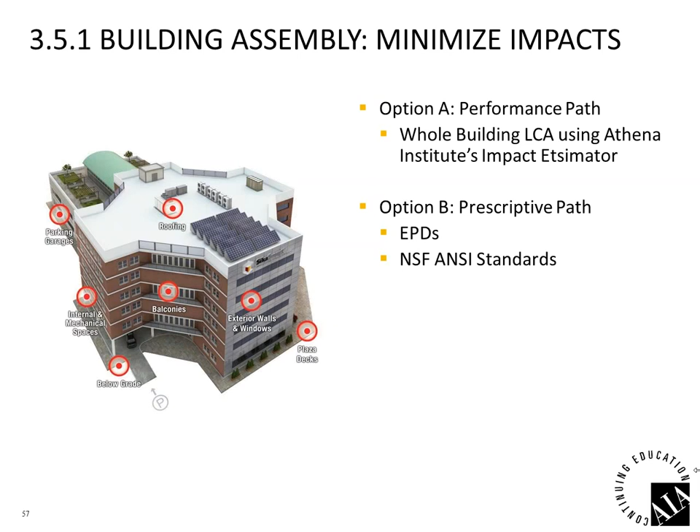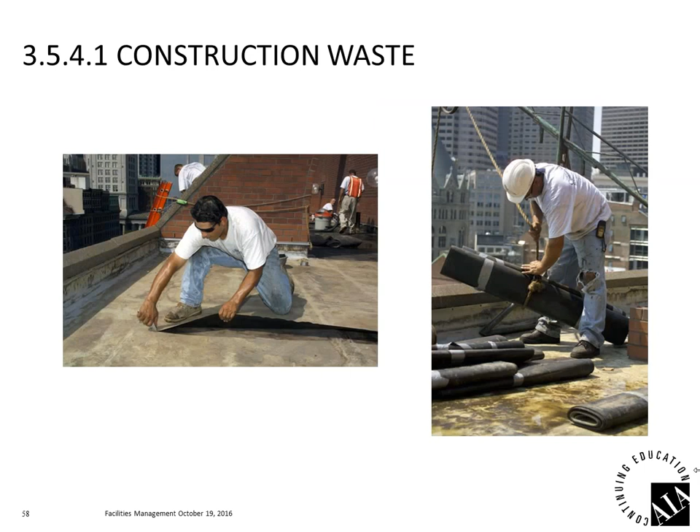There is the possibility, again, as there is with LEED as well, to look at whole building performance by looking at whole building LCA, for example, which can be done with the Athena Institute's Impact Estimator. However, in the absence of that, there are prescriptive methods through the use of environmental product declarations and the use of the various NSF ANSI standards for the sustainability assessment of the various building components, which are another path to achieve those points.

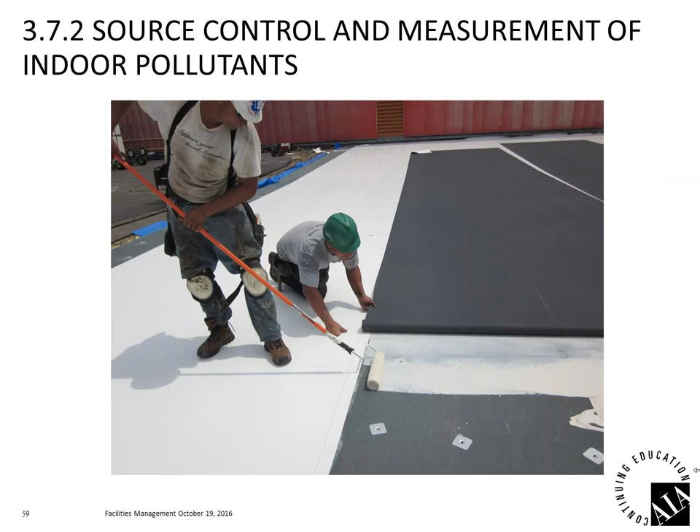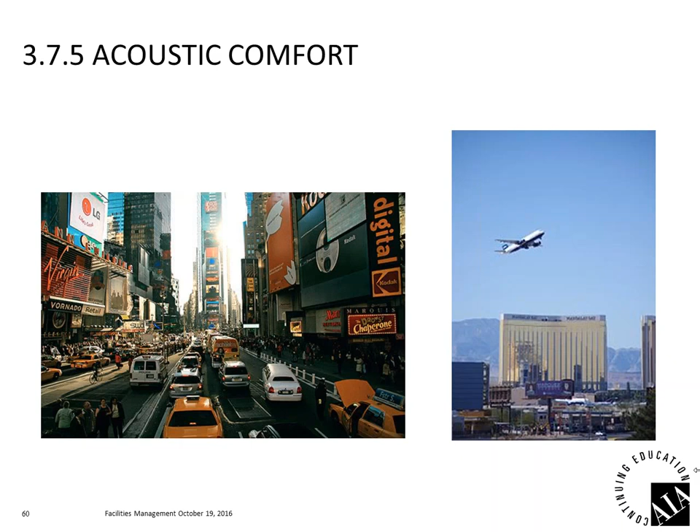So we all want to avoid greenwashing, and we would suggest that the best way to do that is to, wherever possible, reference American national standards in your product specifications or your construction specifications. And when you're looking at some specific metrics or specific attributes, we strongly encourage you to insist on certification from credible third-party entities like NSF, Underwriters Laboratory, ASTM, etc.

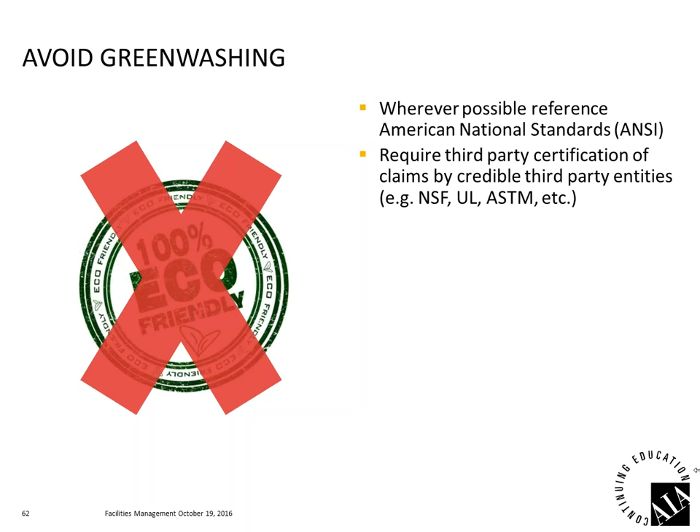The whole area is a veritable alphabet soup of acronyms, and we've only touched the tip of the iceberg here. There are many, many more. We've only looked at the most common, but these are things that we're going to have to understand, and we'll learn to understand over the years if we are going to build sustainably.